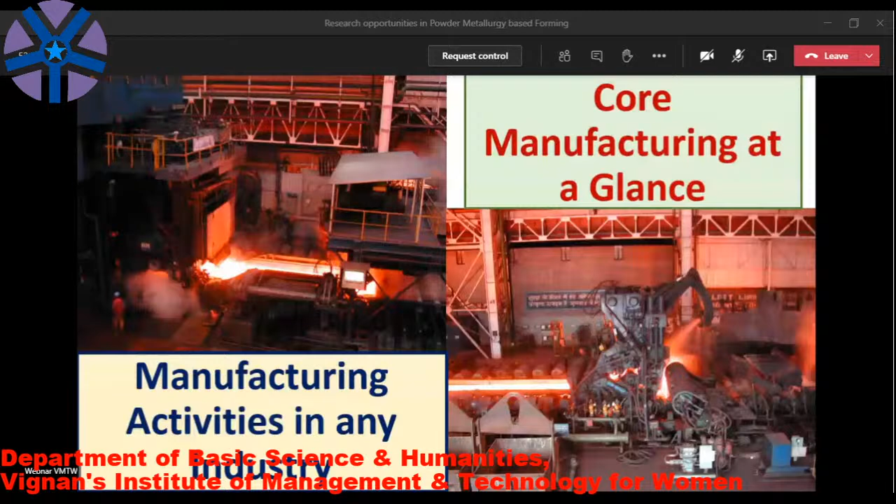So the very basic thing is, first we have an idea in our brain, and later that idea gets converted into a product. In between that, there are so many things. The idea getting converted into a product is the real magic that an engineer makes. Once upon a time we thought how data can get transferred; today GBs and terabytes of data are getting transferred within seconds, milliseconds. That's the beauty of an engineer.

So if you want to change your idea into any product, then there comes the final resort of enjoying the product, which comes from manufacturing. You see this materialistic world, it's called a materialistic world, participants. This materialistic world is filled with a lot that has to be manufactured to feel it. Hence manufacturing is the last resort of the idea getting into a product shape, and we touch and feel the product. An idea getting converted, the place is what?

If a thought is there to make a recipe, it gets manufactured at the kitchen, and to taste it you require a kitchen and you require materials. So in this materialistic world, materials are so powerful. You introduce a new material, the world changes totally. With the invention of polymers, a lot of wood components have been thrown away, and a lot of steel components are replaced. So that is the part.

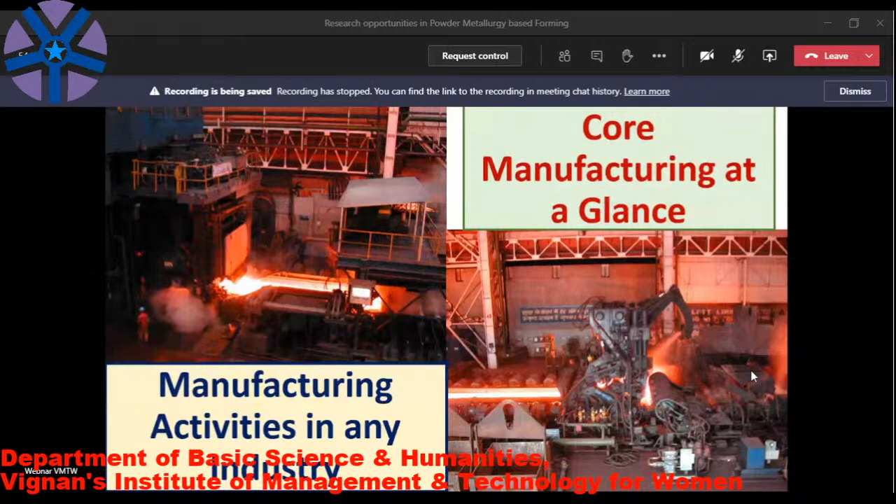With the invention of titanium-like alloys, the aerospace and defense industry has revamped itself in so many spheres. Hence manufacturing is one of the very fine activities that happens in any industry, particularly core manufacturing like mechanical, electrical, electronics. You want an electrical industry, we might not have seen the things around us; if you see, you feel the power of manufacturing. A lot of manufacturing takes place, a lot is involved.

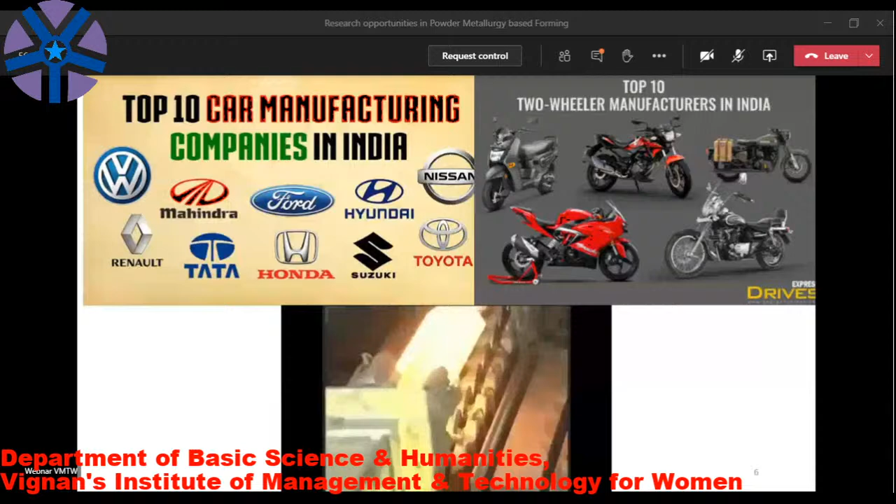Every component has to be manufactured, and there are different manufacturing methods. Material comes in different forms, and the ultimate idea is point of application, environment of application, situation of application, time required for application, and how long the component has to perform - all has to be taken into account before the product is manufactured.

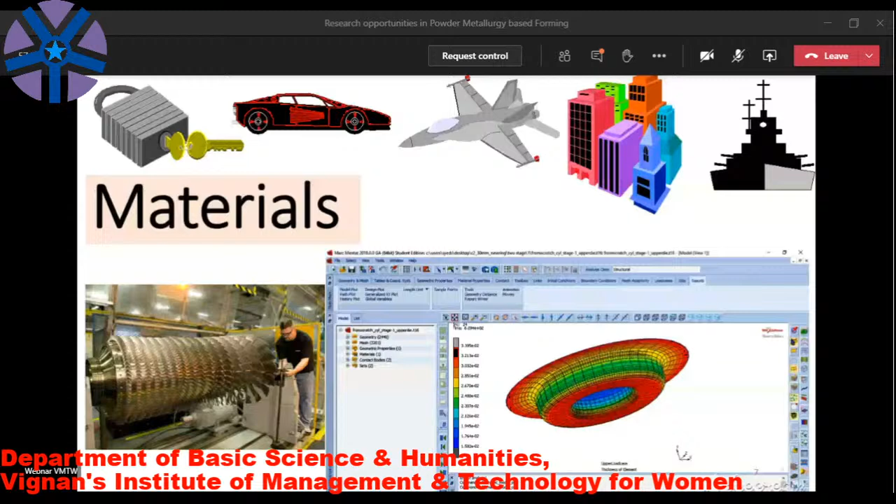Material is required for everything in this world, and it may be in solid form, liquid form, gaseous form, plasma state - whatever it is, you have different types of materials. This is the basic classification of materials: you have metals, alloys, non-metals.

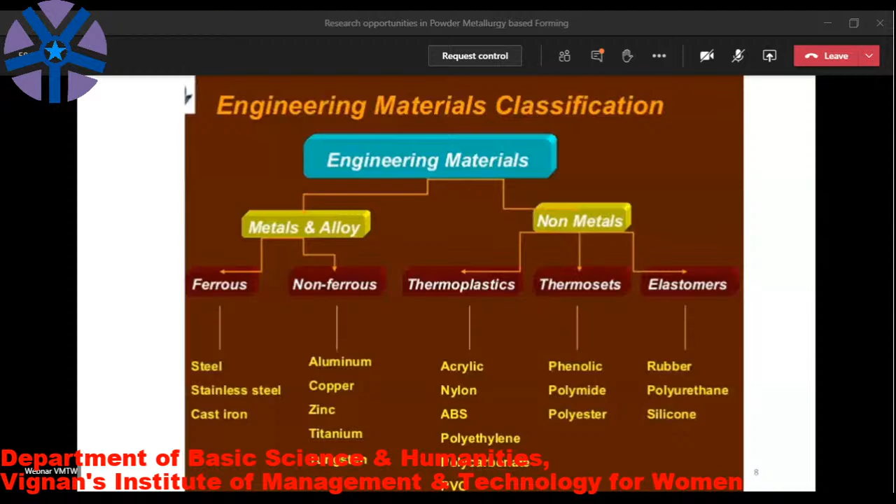The beauty of powder metallurgy is that all these materials can be made into powder and enjoyed. If you want to feed a child, everything comes to a semi-solid state - any food category, whether solid or liquid, even very hard rock-solid food can be brought into a semi-solid state. Similarly, whatever materials are shown on screen can be made into powder state and processed to harvest the advantages of powder metallurgy.

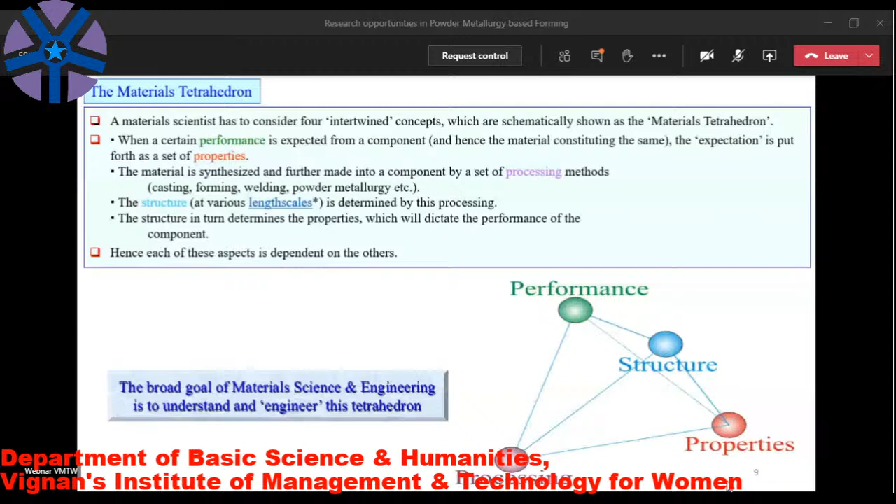These are four intertwined concepts a material science engineer has to consider, all interrelated. You have to converge at one particular point and then go for your best. The structure is composition, phases, structures - all those things are there. And what are the properties?

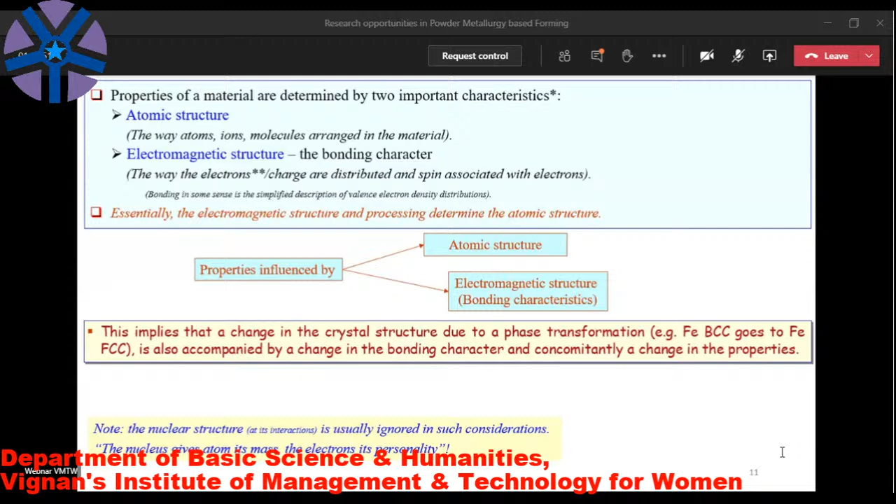If I go over here, you can see structures like BCC, HCP, and so on. That structure has two ways: the way atoms and ion molecules are arranged is called atomic structure, and how the bonding takes place is electromagnetic structure - the way electron charges are distributed and the spin associated with electrons.

So what are the properties of materials? Atomic structure is one corner of the tetrahedron, along with electromagnetic structure. From my mechanical engineering point of view, or its application point of view, I see basic mechanical properties, behavior under loading, physical properties, and chemical properties - these are the basic properties of materials.

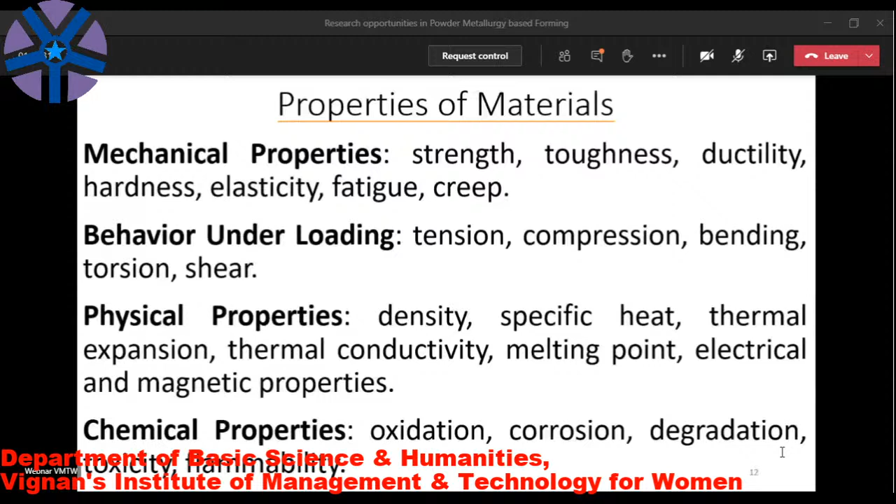Then how the crystal varies - an atom joins all these to get the structure. There are two types of structure an engineer has to balance: one is crystal and another is electromagnetic. Then through thermomechanical treatment, your microstructure changes, and at last the material in microstructure form is processed through basic forms: casting, metal forming, welding, powder processing, and machining - and it becomes a component.

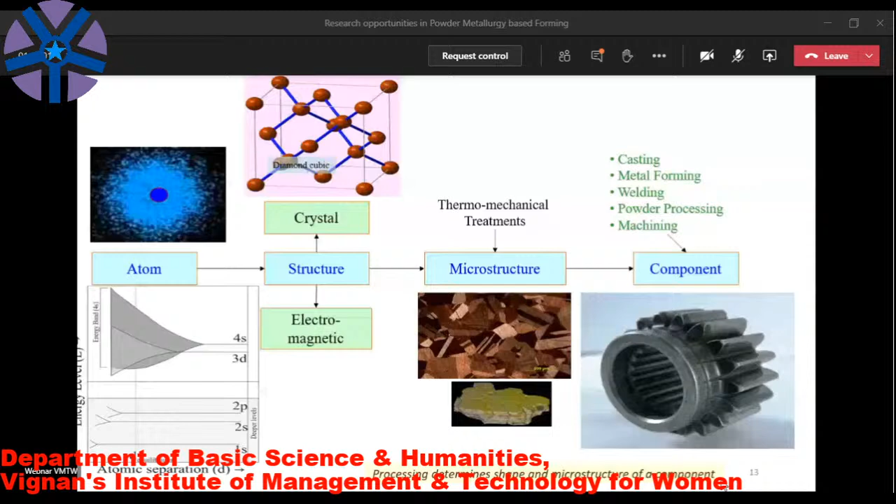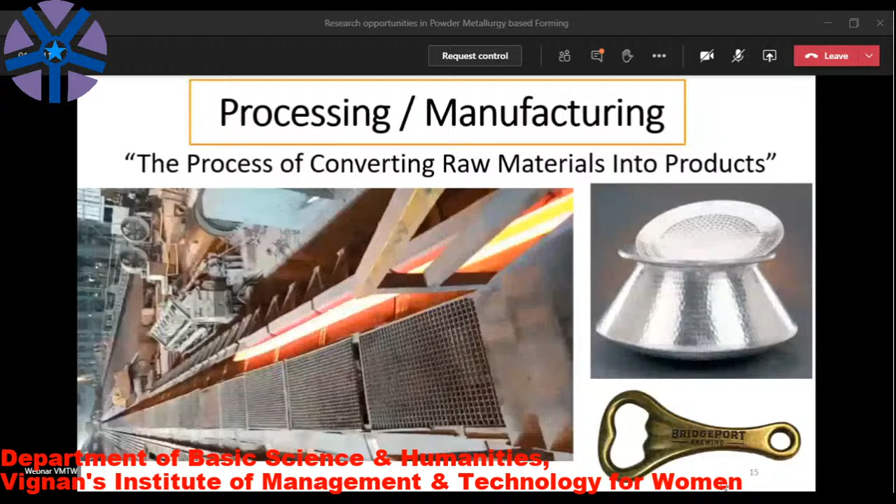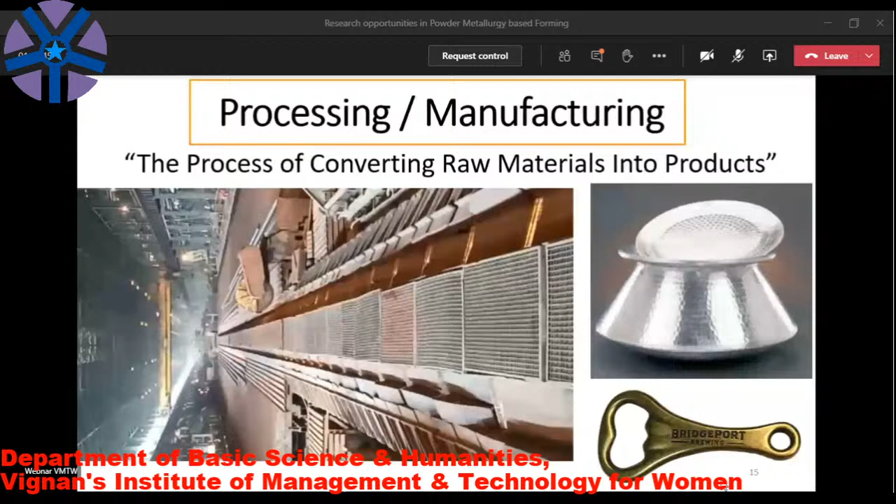So all this has to be considered, and we are much concerned today about powder processing - how to process it, what is the need for processing - all these things we will see. Performance and processing - the performance depends on all these three topics.

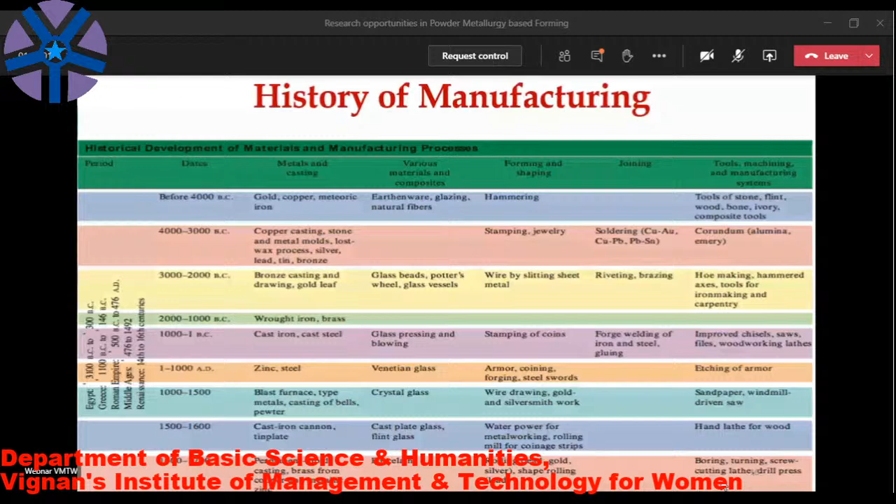So what is the history of manufacturing? It starts from 4000 BC or so, and goes on one by one - today's activities include die casting, lost-wax process, ceramic casting, all of which will be covered. One example is production of cement by dry process - an example of powder metallurgy manufacturing.

The very best way to enjoy powder metallurgy based manufacturing is in one's kitchen. My particular area of research now is how through powder metallurgy I can make sheets and plates. Sheets and plates are meant for ductility, but powder metallurgy components are brittle in nature. So can I balance between this brittleness and ductility so the sheet or plate is balanced - neither brittle nor completely ductile? And where can I apply that? This is the million dollar question running around the industry.

Titanium has certain properties, aluminium has certain properties. In solid state, I can't mix both and get the benefit out of it. The only way I can make benefit out of metals or materials or alloys is by making a powder mixture. The best component is making mixture - you get all items, crispy, non-crispy, salty, sweet, everything mixed together, and it gives a unique flavor.

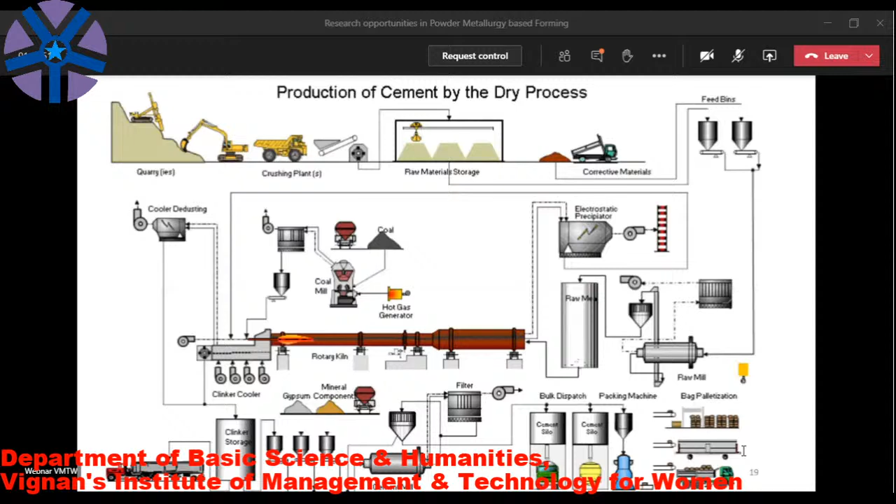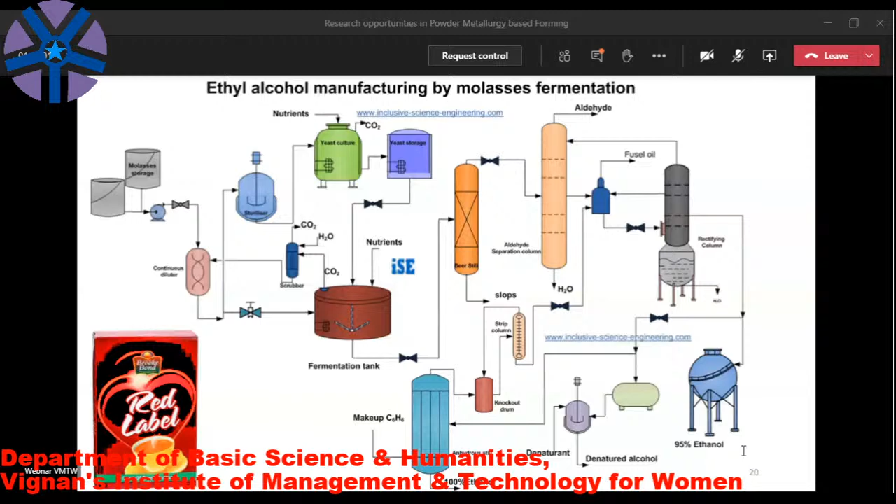The tea powder is one best example of a powder metallurgy component, though the size of the powder is somehow different. The biscuit is also a beautiful example of a powder metallurgy component - it is powder compressed and then sintered. First green compaction with a Parle-G, then it goes into the oven to get sintered, and it comes out as a very nice product.

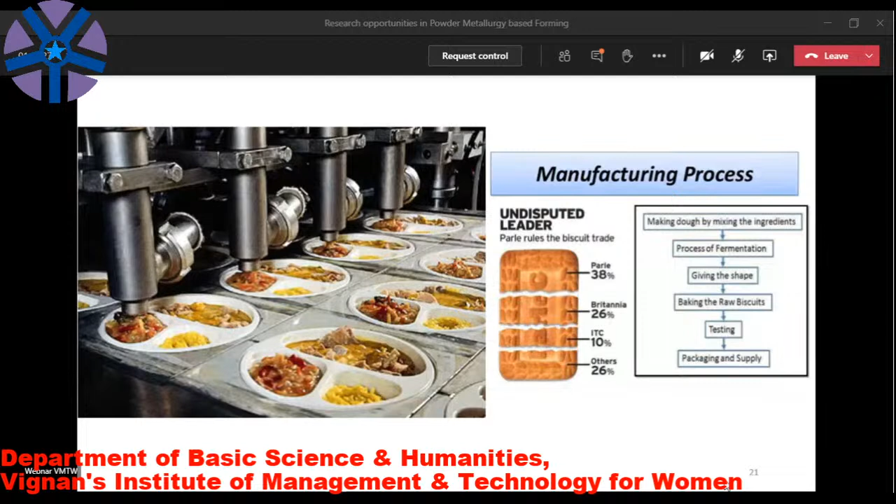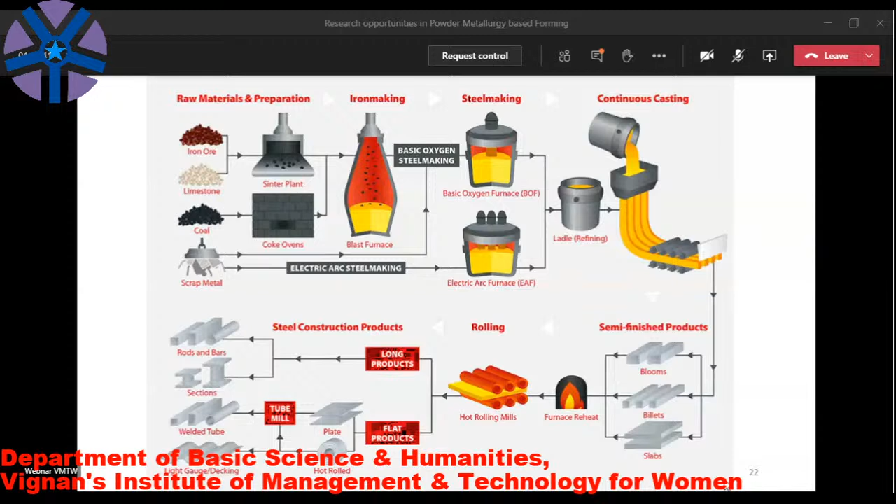That's the eating industry, whereas in engineering industry, how can I do all these things? That is the beauty of this lecture. So anywhere, everywhere, you could see these steels, powders and all going in and coming out. Every industry uses a lot of powder metallurgy components.

People may wonder where these components are used - a lot of components are used, and I will show you in my upcoming slides.

Any manufacturing process, I process this way - I can shape it, I want to enhance the property, or I can surface-process the surface. Whereas shaping, this particulate processing, is our area of interest. I give input as powder, and I want output in the form of a sheet.

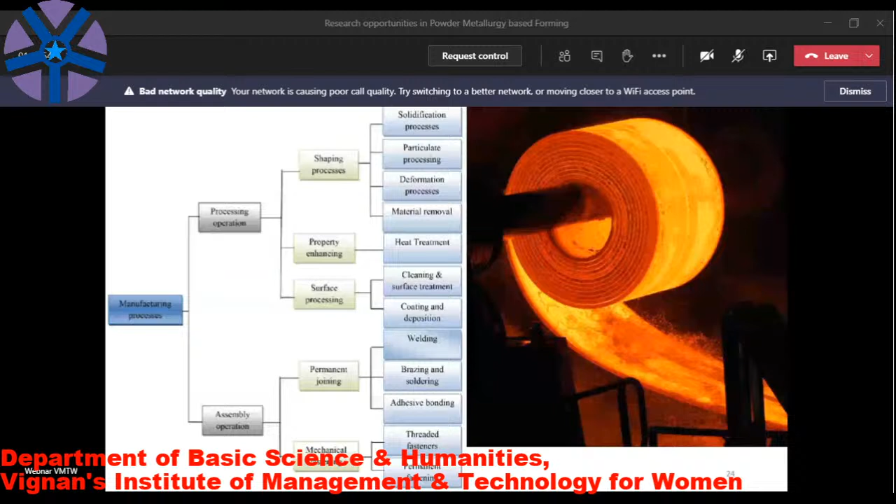For example, if they need to be sheets, it should be processed. See, titanium's stiffness ratio is high, magnesium's stiffness ratio is high - if you try to roll it like this, it won't come out as a sheet. Either by hot rolling or cold rolling it's very difficult to get the sheet, and the structure is different, its performance is different. Hence, how can I process this?

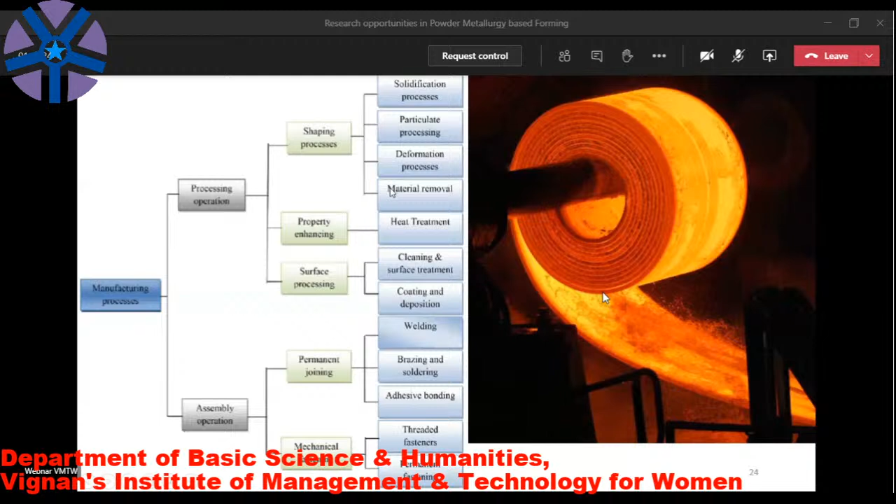One more big advantage of powder metallurgy is near net shape forming - in one single shot I can form it. So I want to process the particles, I want to process the powder into a sheet, if that I could do.

Normally we have a top-down approach and a bottom-up approach. I'm going to go by the bottom-up approach, taking atom level, molecular levels. That's where a lot of ball mills come in - you can make nano powders of any number of metals or alloys, and mixing is another parameter. The size of the powder is another factor, all of which can be controlled.

If you purchase wheat flour for making your chapati, different companies give different sizes of powder, and based on that, the taste of the recipe changes. Similarly, if you change the ball size here, the powder size - nano - your component is different. You join clusters, then nanoparticles, then make it into powder, and then bulk it.

We actually start here. Still, you can come from down also and make this powder - a lot of research is going on in all these areas. This powder, when combined, gives you a bulk component or a sheet component, whatsoever it is, and it has a totally different set of properties which neither material alone has, since the powder may be a combination of 1, 2, 3, 4 alloys.

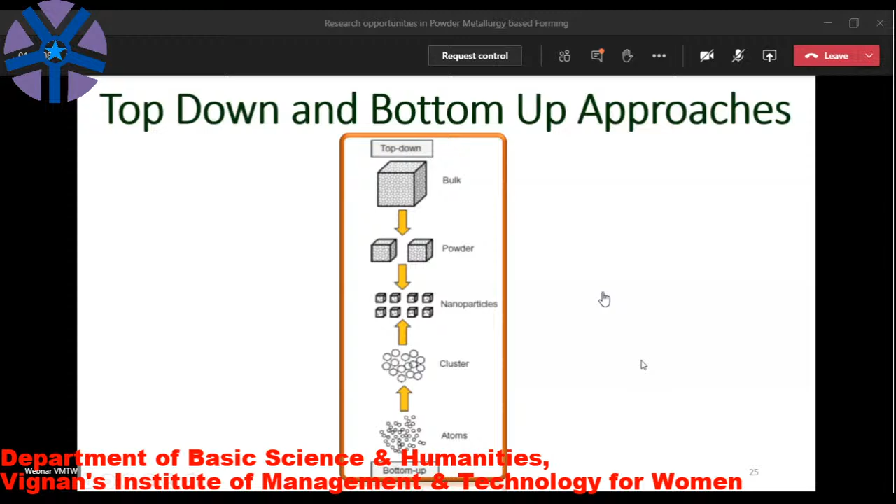You will get a totally unique one. See, all these are beautiful examples of various mixtures mixed.

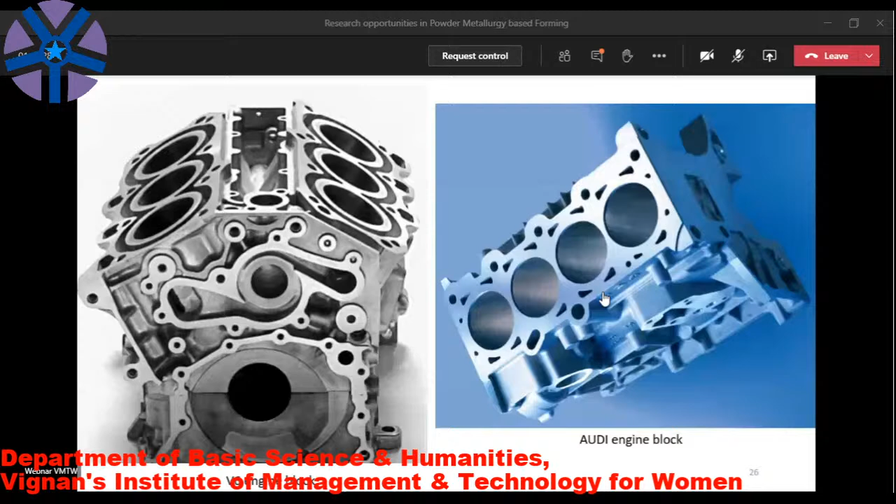Actually, it is casting. If it is taken to liquid stage and then poured, it is casting. If the same powder is compacted and sintered, it becomes powder metallurgy. These are all very beautiful examples.

You could see that this is casting, where you melt and flow, whereas in powder metallurgy, you use the powder form.

Science of producing metal powders. So now, what is powder metallurgy? You make metal powders. You take any metal alloy, whatever it is, crush it, and put it in a ball mill. The size you can change. So finished, semi, from mixed or alloyed.

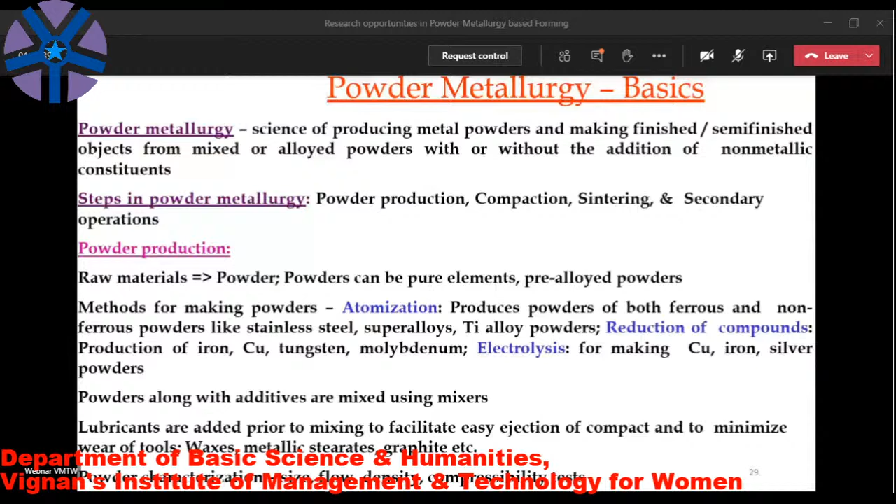How to make powder and then how to compact it. What are the various process parameters involved? How can I optimize it for this particular application? A lot of research papers exist. This is a very good old technique, very old technique. Hence, it is difficult to find new problems in this area. But still, once you start enjoying it, sky is the limit.

So after making powders, what do I do? Then I have to go for compaction. What type of compaction will I do? You can go for green compaction or hot compaction. Green means you don't heat it or put it into a furnace.

By HIP, or else pressing from all sides, pressing from one direction, pressing from two directions—uniaxial pressing, biaxial pressing, triaxial pressing, with the die and the component at the same temperature pressing, that is hot isostatic pressing. So you have a lot of variants in that.

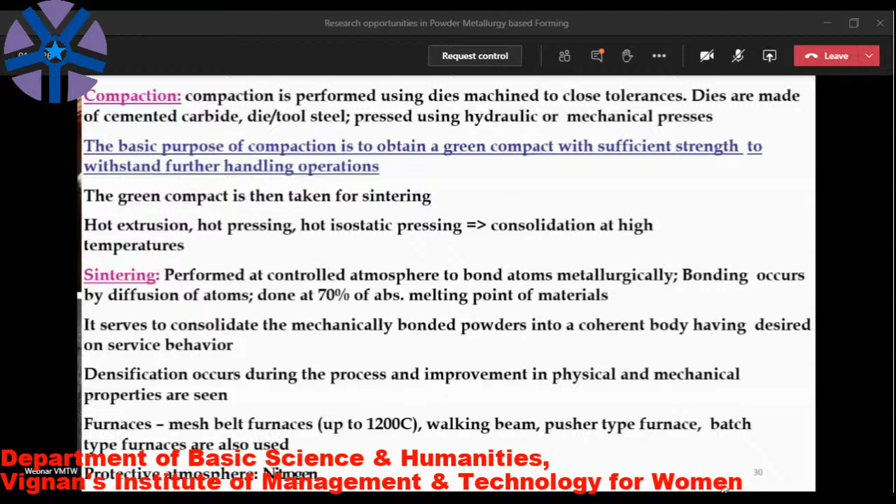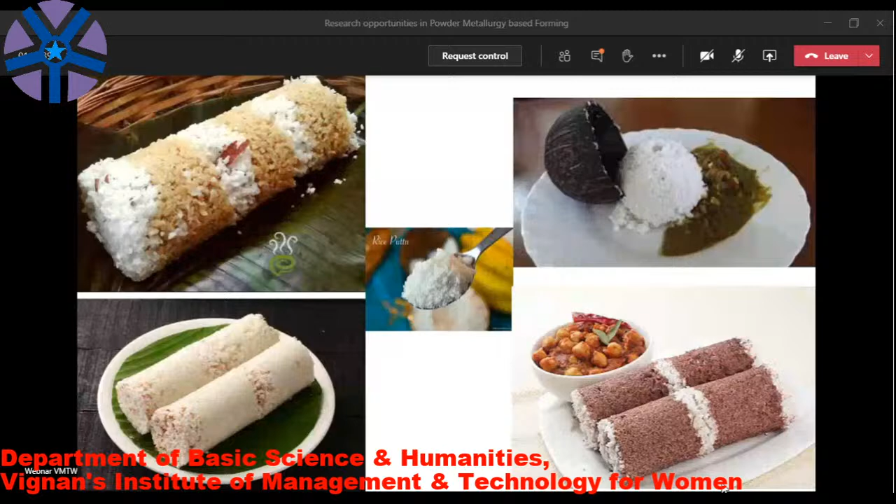Similarly, you can see over here - concrete is one old technology that makes use of the powder metallurgy concept. Just extend this trend: that is in civil engineering, we want to explore something in mechanical engineering. Concrete is very good in compression - it has very strong compressive strength. So if we could use powder metallurgy and get a sheet which is good in ductile performance, it would be a service to society.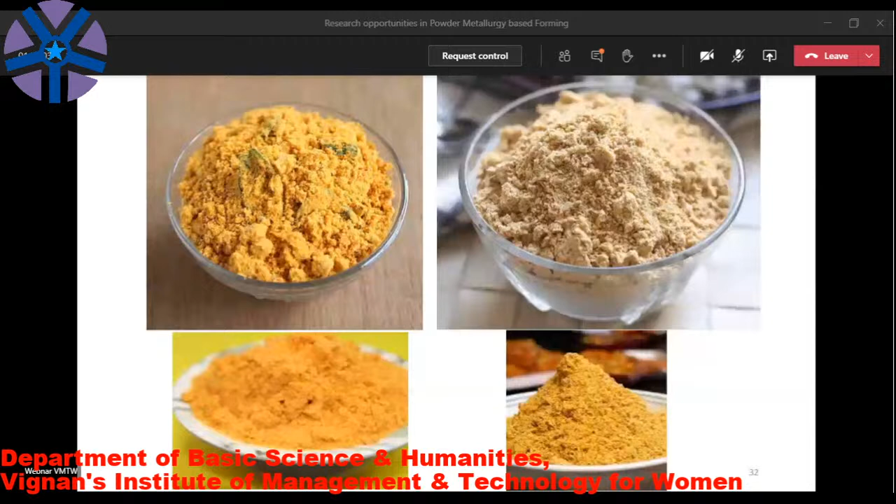This is another beautiful example of a powder metallurgy concept. That's what I say - it's all about what we observe and how we introduce this idea into our engineering field. So how you make all these will be made by this methodology only.

These are the various methods to make powders - you atomize, you reduce, you electrolytically deposit, or use mechanical alloying. See, concrete is essentially mechanical alloying - you can do the same for other powders. For metal powders, you control the size of the particles, and then you add lubricants, because when you are compressing or compacting it, friction between the powder and the die creates interesting issues - that's why you use additives and lubricants.

You blend it - blending is one of the best parts, how well the different components of the powder mix. The best example I could give is you just blend and blend and blend. Then you can go for cold extrusion or injection molding - all these are done at room temperature.

Then next is hot compaction. If you do cold compaction, only sintering is required, whether in an atmospheric environment, vacuum environment, or controlled environment. And once the component is ready, it comes out for secondary and finishing operations.

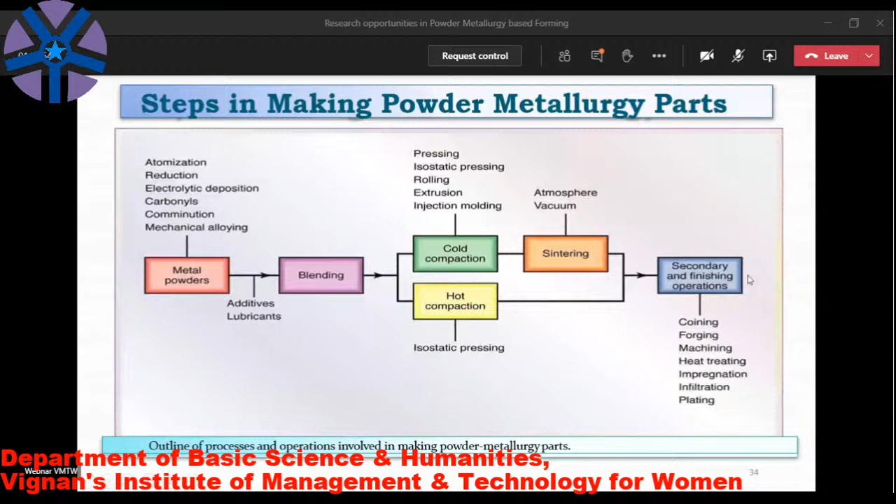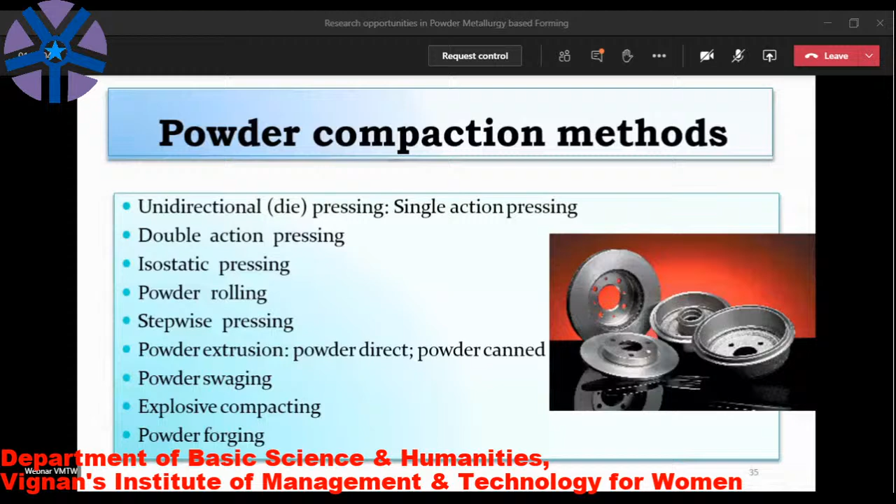So this is how I make it. Powder compaction methods include different methods: double action pressing, isostatic pressing, powder rolling, stepwise pressing, powder extrusion, powder swaging, explosive compacting, and powder forging. So this is how I do die compaction - you can go through this later.

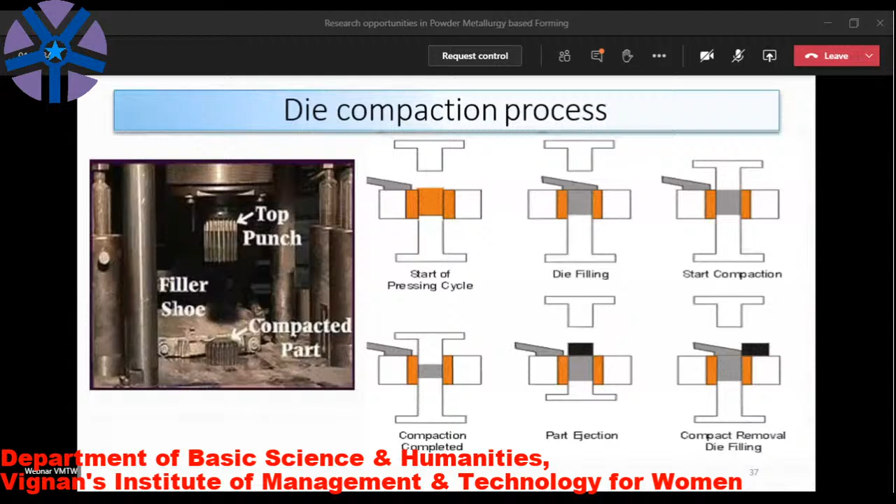How I compact it: I start the pressing cycle, allow and fill the die. It is empty, so I fill the die with powder - this powder may be a mixture or a single type, and the size of that is different. Then this comes down and starts pressing. Compaction is completed, and the part is ejected. This is unidirectional compaction.

You also have bidirectional compaction - from top and bottom you can compact. Whatever shape you want, you can get it compacted - that's the beauty, that's why it's called near net shape forming. You just compact it and get it in whatever form you want, like some bushes.

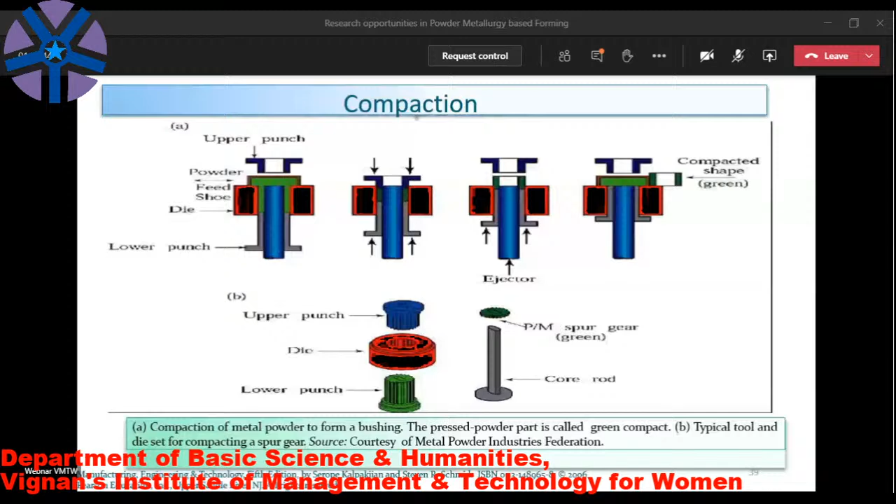Green tools, what is in lathe machines: we have a single point cutting tool, and in that single point cutting tool we have inserts. Those inserts are processed through the powder metallurgy route. A very small piece of insert, routed through powder metallurgy, will shear a component made of MS or steel or whatever material. So that's the power of powder metallurgy one should understand. These are all some examples of components manufactured through powder metallurgy.

We might have seen these at several places. Ceramic components - ceramic is a beautiful material that has to be made this way only; there is no other way. Every day we brush, every day we go to restrooms, and within different shapes the ceramics are molded. Lot of component products are processed through powder metallurgy.

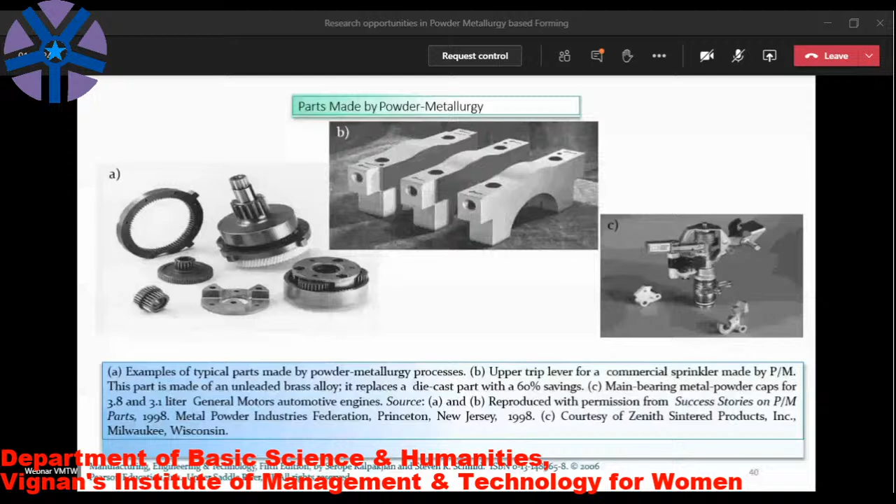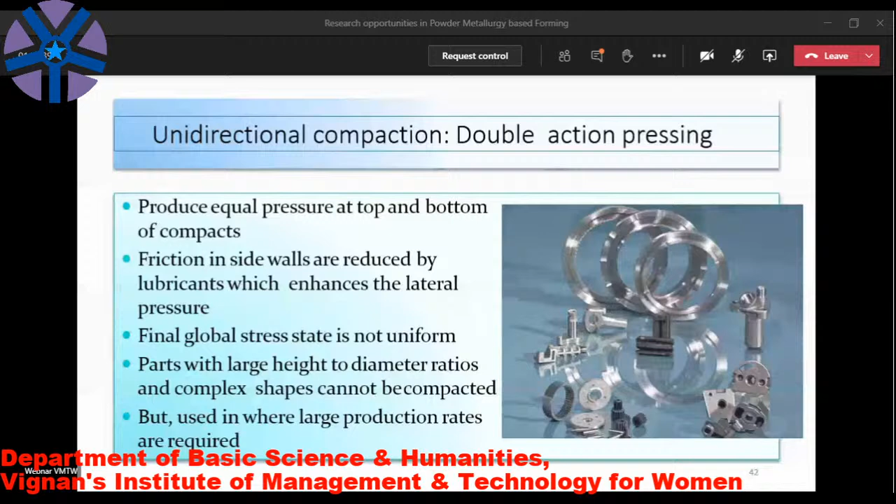This particular component shown in the figure is an example of unidirectional compaction. All of these are examples of unidirectional compaction, and at every stage we have to take care.

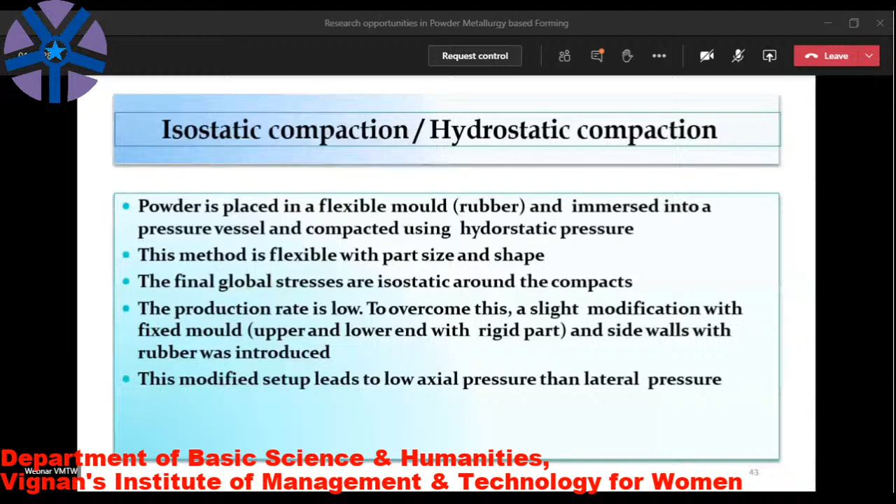You also have triaxial compaction, where sigma 1, sigma 2, sigma 3 - all principal stresses - are controlled at the same moment of time. The setup is similar to fixed mold isostatic pressing. Lateral pressure is given and axial pressure can be controlled separately. Shear stress within the compacts enhances green density and strength. Torsional shear stress is applied, and minor principal stress is uniform in all directions.

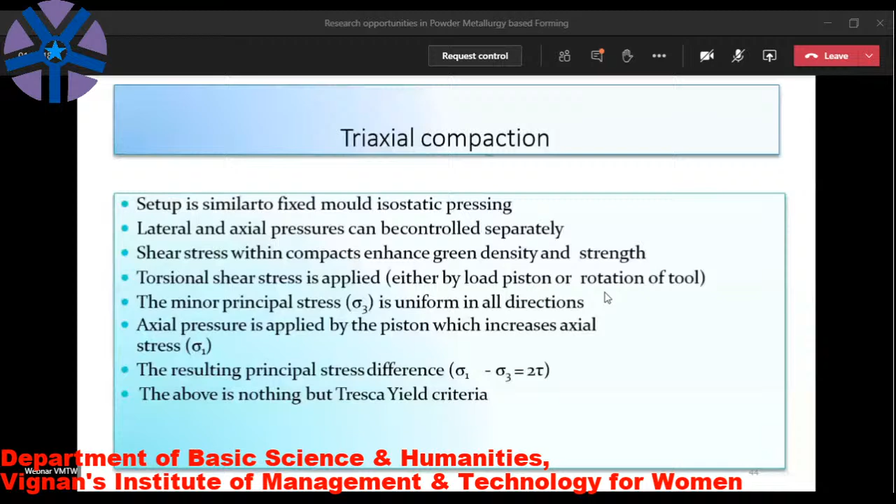There is a wonderful book I have kept in reference - on powder plasticity through powder metallurgy. We tend to assume in our minds that any component made through the powder metallurgy route will be brittle, but there is a separate book devoted to plasticity through powder metallurgy. You should go through it and enjoy that book.

You can even vary the density in compacting - this part may require more density, and this part may require less. I press here more, and I press here less, so naturally the density variation of the part is also different. This is one of the best advantages of powder metallurgy - whatever you want, you can do. The only thing is the cost involved in creating this initial setup is heavy and hefty.

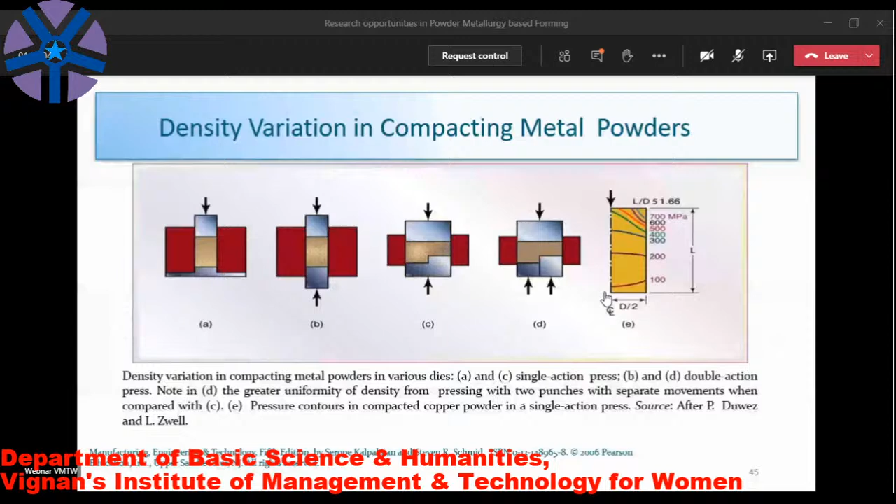Compaction of metal powders by cold isostatic pressing: metal powder is placed in a flexible rubber mold made of neoprene rubber, urethane, or polyvinyl chloride. The assembly is then pressurized hydrostatically in a chamber using water, with 400 megapascal pressure maintained. The mold containing the green powder has pressure applied from all sides, so a hollow tube comes out with no residual stresses. If you make it through extrusion, rolling, or tube forming, a lot of residual stresses will be there - but residual stresses are eliminated if you compress a powder like this. This is another example of cold isostatic pressing.

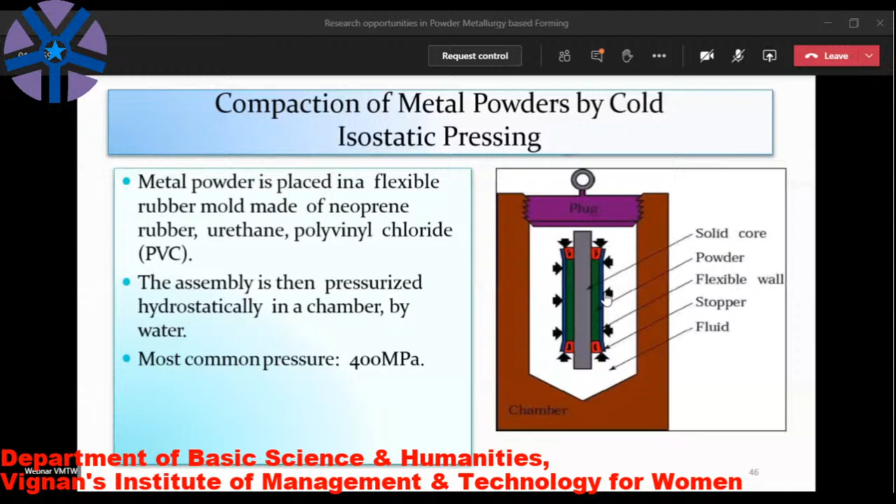What about die insert and liner? We have different problems here - die wall friction. Particularly in uniaxial load, this makes the powder deform and spread laterally. This lateral pressure acts against the tooling and creates wall friction, which reduces powder flow and sliding during compaction. There is continual pressure loss with distance from the punch as the powder bleeds off. The friction is only at the wall, but it affects the complete product - in powder metallurgy, the entire product gets disturbed because of this die wall friction.

That's the reason we go for lubrication. What type of lubrication helps? Molybdenum disulfide, or it can be mixed with other powders also.

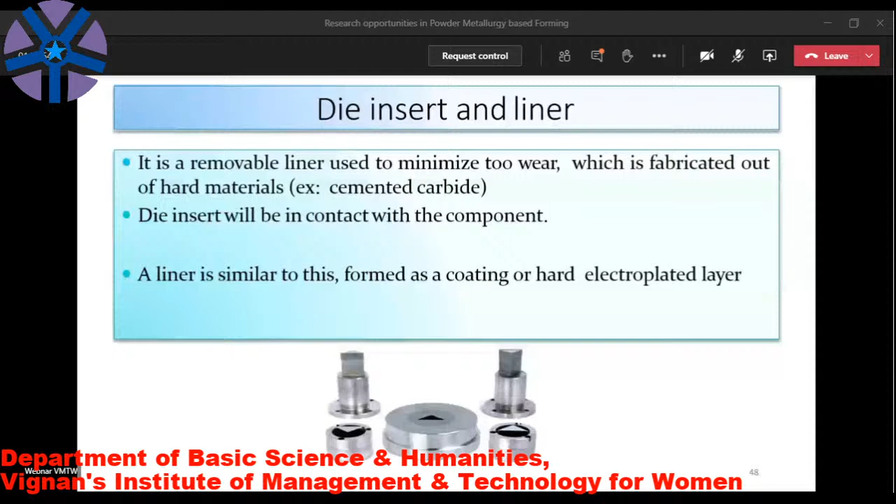This is my area of interest - how I roll, how I compact, and how I make a sheet like this. On this sheet, the question is very clear. You roll and make a sheet by normal rolling, and then you put powder in and roll it to get a sheet.

Is it possible to make this second sheet stronger than the first sheet? If that could be done, it is a patent. So, powder is fed through a roll gap in a 2-high mill and is compacted into a continuous strip at 0.5 meters per second. This rolling process is carried out at room or elevated temperature.

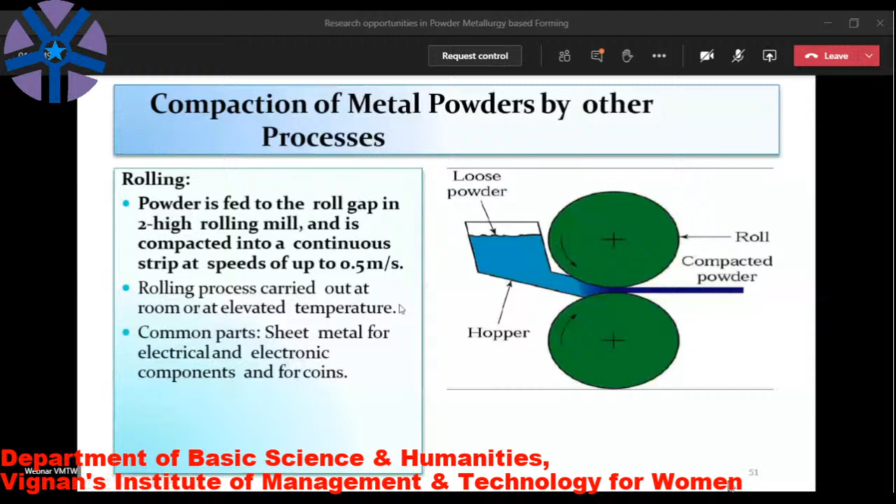So how do we do this and how do we get this? See, a very beautiful titanium example. Why has this fellow not rolled the titanium strip in normal rolling? Instead, he has used powder metallurgy, because if you roll a titanium strip, it won't roll properly. Instead it chips off the roll, adheres to the roll, and you can only take chips, not a continuous strip.

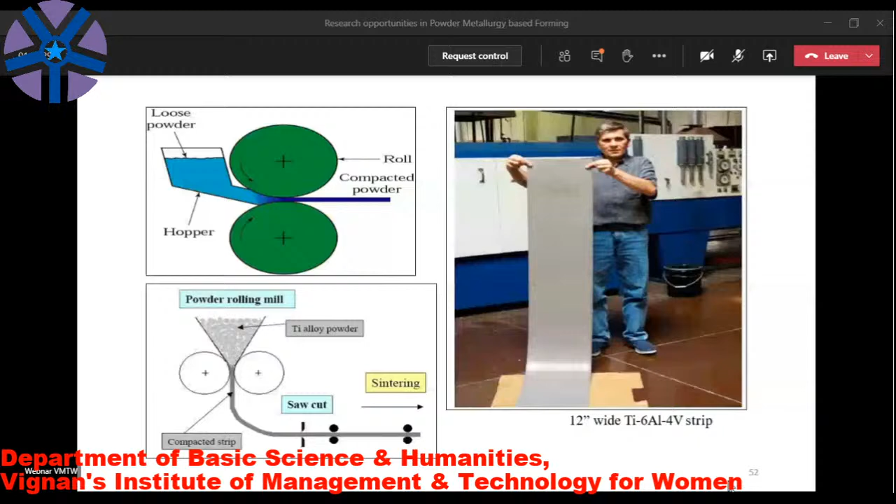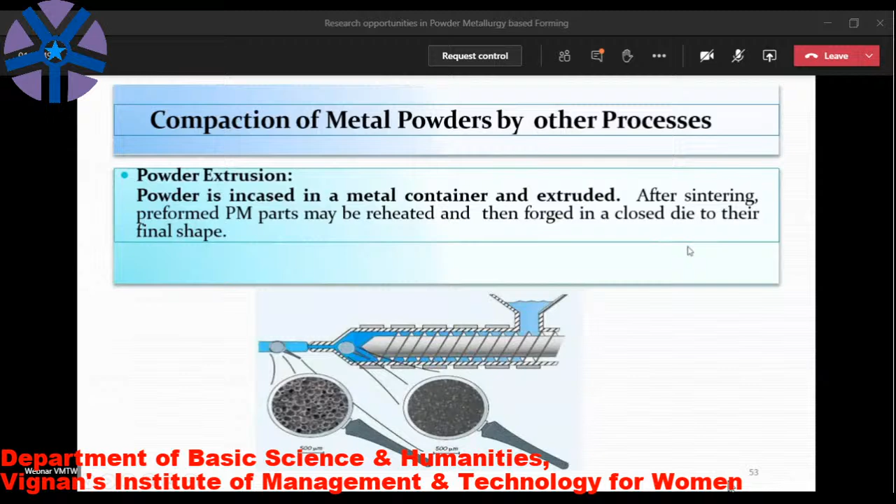Okay, so that's how we have to do it. Next is injection molding. By injection molding also we can do this process. You see the pan, what you use in your non-stick containers, how such kind of things are made. After sintering, preformed PM parts may be reheated and then forged in a closed die to take the final shape. You should see that.

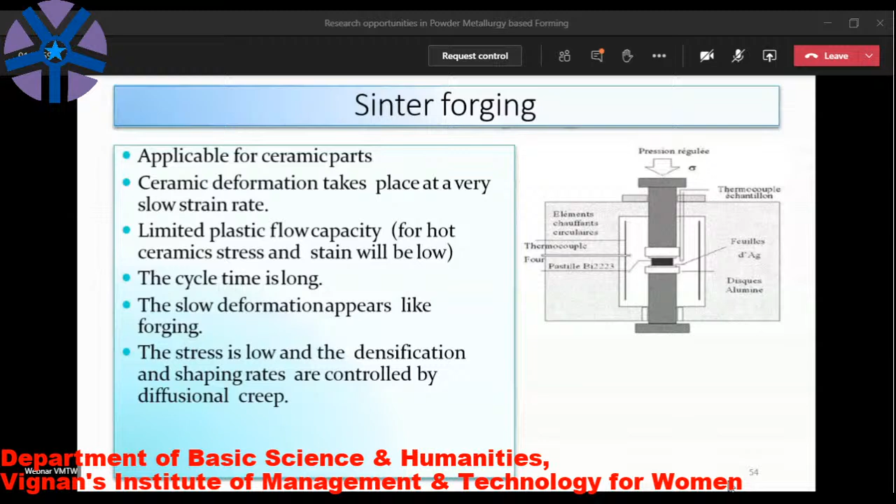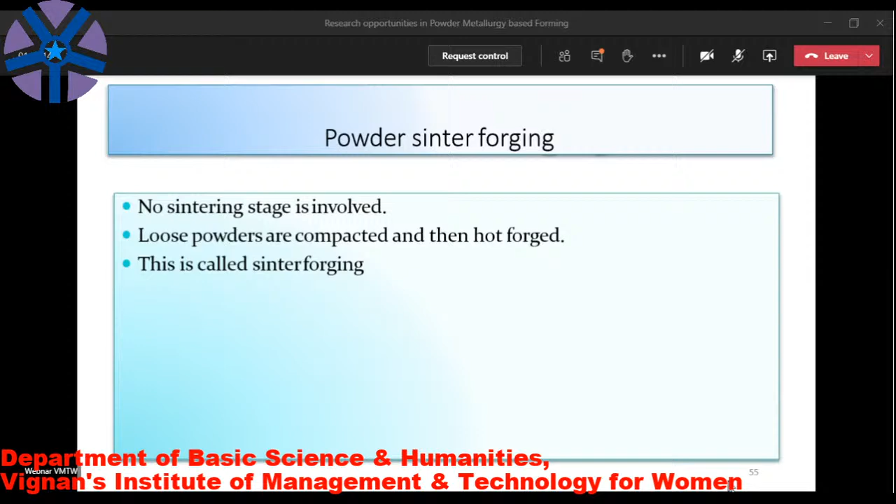Then sinter forging. This is one beautiful case where you heat and forge at the same point. This is what is called sinter forging. No separate sintering stage is involved. Loose powders are compacted and then hot forged. This is called sinter forging. These are some of the advantages of sinter forging.